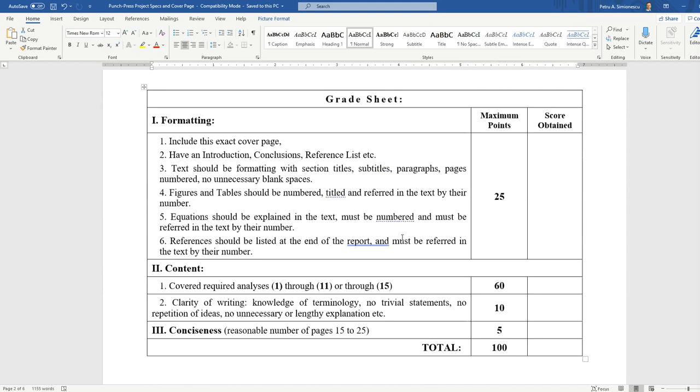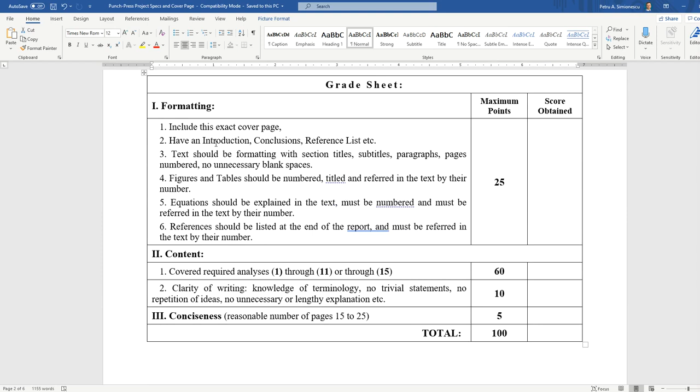This cover page will be made available to you. Pay attention to the grading scheme here. There are 25 points just for formatting. Please read carefully. Make sure to include the cover page, of course, filled out with your name and who you collaborated with. Everybody has their own values to work with, so it doesn't mean that you will submit the group project. It doesn't mean that there will be two project reports identical.

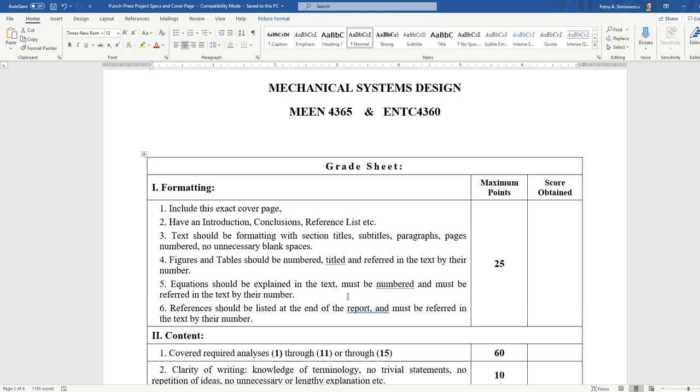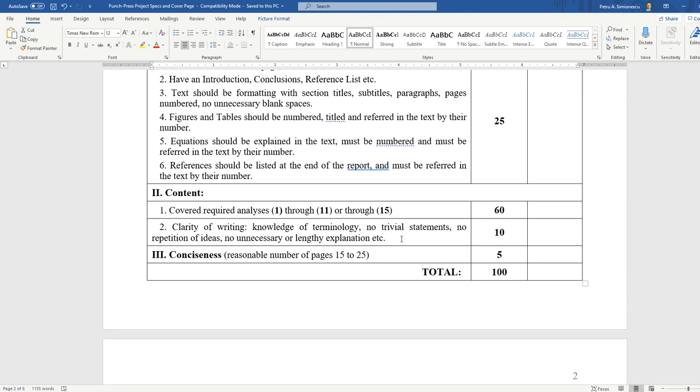If you check the syllabus, you have to submit a midterm project report and the final project report. Note the points for conciseness. Midterm project reports include steps 1 to 11, and then the remainder steps, which are actually 17, so I need to make an update, will be for the final project report. This is very time consuming. It's also used, the results, scores obtained by students on this assignment, as an assessment tool for program accreditation, ABET accreditation.

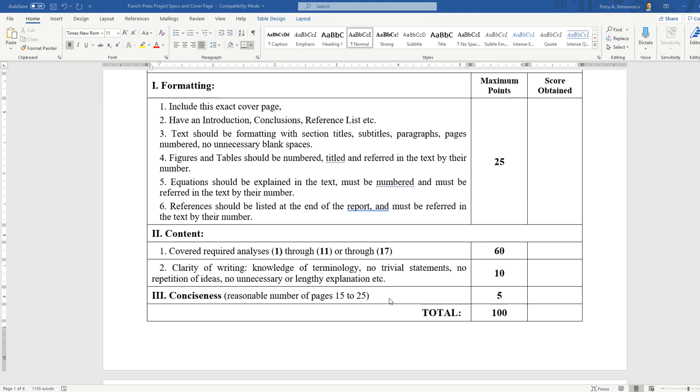Okay, so what you will have to do is to choose your own values. This table here with rows 1 to 8. So first you select the material, check 1, that you will be punching hole through. Thickness, you have some recommendations here on the values, and this will be the crank RPM at 7. You choose the RPM, so number of punches per minute is the crank RPM.

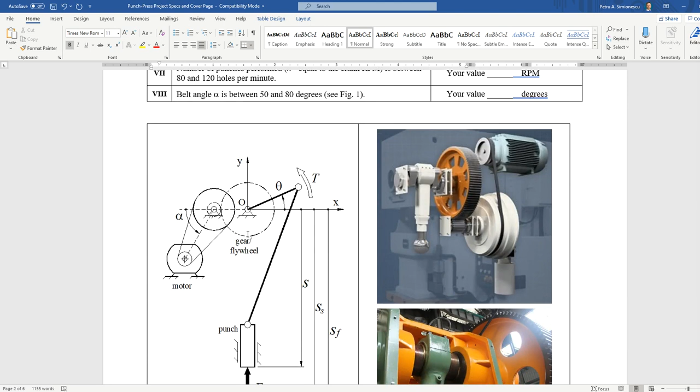Okay, so this is a kinematic diagram. It shows the slider crank mechanism. This is the punch that penetrates through the stock. There's the crank length, there's connecting rod length. It's not a centric mechanism. You need to choose a slight eccentricity, and it moves vertically. Slider moves vertically, not horizontally. So please make sure that the analysis that you're doing and figure that I'm seeing is for this kind of orientation of the crank slider mechanism.

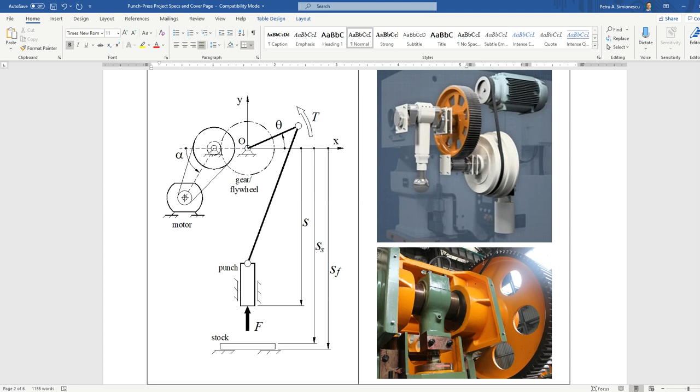To the left, you see schematics of the electric motor. This will be the sheave on the motor shaft. This is the sheave on the intermediate shaft, the one that you have to calculate, which has a pinion attached to it, and the pinion meshes with the gear, which is moving together, is assembled with the crank of the press. I have here some photographs.

This one is the most relevant. It appears to be a CAD drawing of some sort. I don't know how they got this translucent chassis of the equipment. So the electric motor, and it's right above. You have to specify it at the given angle so that you can practice a bit extra when sizing the shaft, with reference to the solid mechanics or machine design, that would be a better name for this class, the solid mechanics class.

Okay, so you have the motor, and it drives this intermediate shaft. Again, this is the one that you'll be calculating, and it has a large pulley to it, and then there's the pinion that rotates together with the shaft and with the pulley, or rather this large sheave pulley.

I'm saying it now, so one of these presses has a clutch included, where if the motor is running continuously, you actuate the press only at a given time. You engage a clutch and it makes the punch cycle. But that's not something for you to worry about. You're just assuming that it's continuously driven.

And then the gear, this large gear, which acts as a flywheel, and you have to size or calculate the required moment of inertia of the flywheel, mass moment of inertia, and then the crank slider itself. It doesn't show the punch itself. You can see here it uses a spherical joint, and the crank is actually maybe not visible here, but on this figure, the crank is just an eccentric shaft.

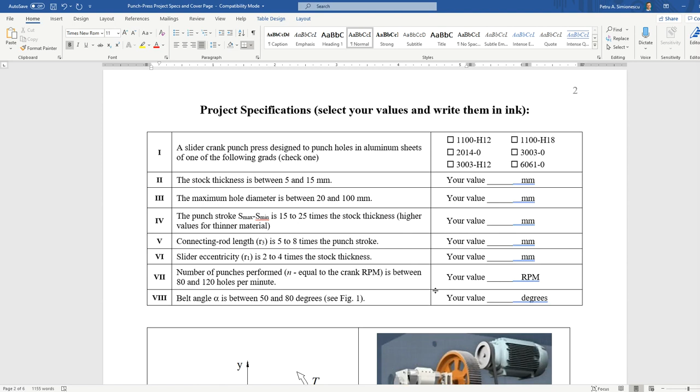We'll begin the chapter on kinematic analysis, so there will be additional theoretical material covered so you can progress with your project.

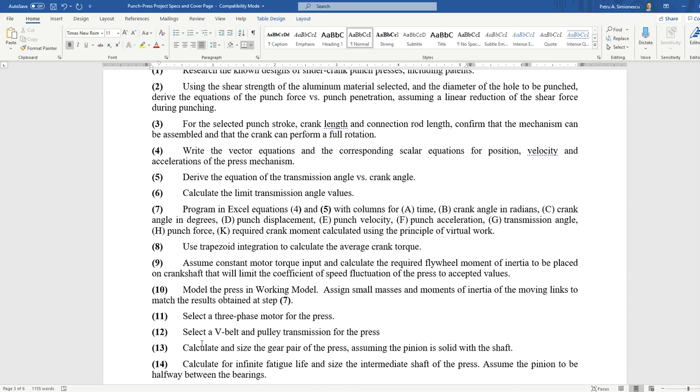I said there are 17 steps, and up to selecting the motor would be for the midterm project. We don't have a spring break, so usually I had the project due after spring break, so we need to decide around the middle, after midterms, to have the midterm project report submitted. But you can start working on this part.

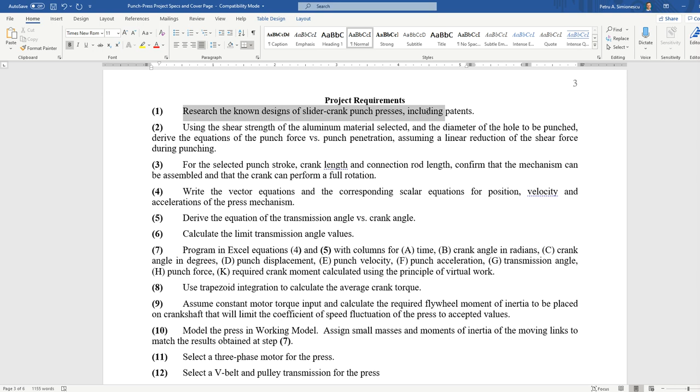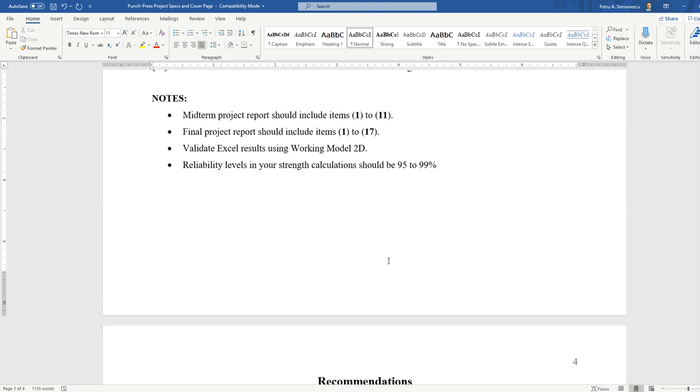Research the existing design of slider crank punch presses in patents. After page 3 of the project specification recommendation, I say do not include this page with your report. Here I'm advising you how to Google what the keywords would be, the search words, including some links. Make sure you understand what you're referencing in the introductory part. Search what others have done, what is out there. Make sure you understand it, not just dumping it into your report to add pages and volume.

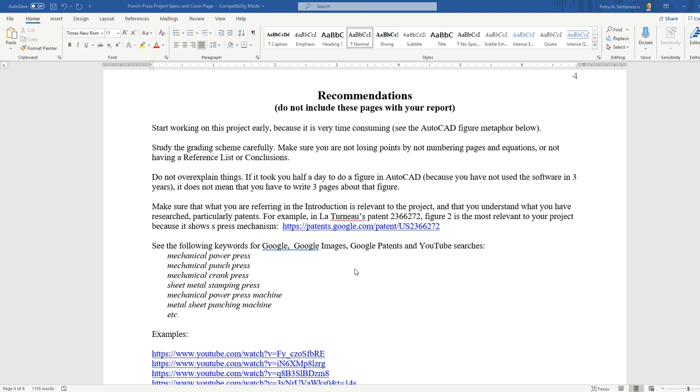Here are two screenshots, one of the Excel spreadsheet that you have to prepare, and the other one is for the working model simulation. I have both up.

In red, this is the way I organize it. So in red are the inputs: crank RPM, punch crank RPM or punch rate. For added flexibility I have these in red as inputs that I can modify, and then some calculated values, for example omega based on RPM. That's very easy to understand what this does.

Then the position, velocity, acceleration of the punch, and then this would be the pressure angle and its time derivatives.

Towards the end, force at the punch, which is a conditional force that occurs only when the punch is moving down and engages the stock, and the corresponding torque. Using trapezoidal integration, you're going to calculate the average torque, and then the energy required to produce a punch, and with that you're going to calculate the flywheel.

So you may want to watch this video later on as you progress with your report writing, calculations, and analysis. This is the working model simulation.

I have some meters here that give it maximum flexibility. I can move the stock in and out, and I ran the simulation several times.

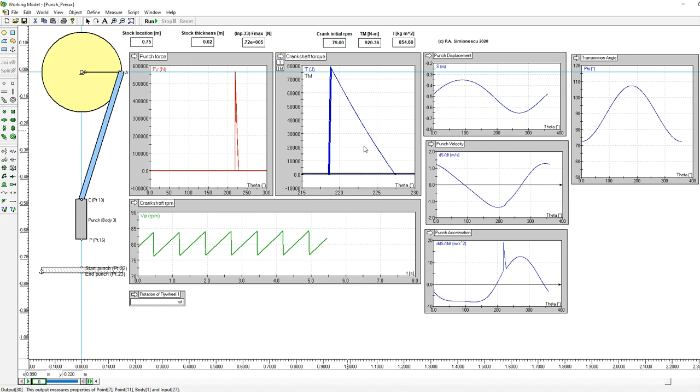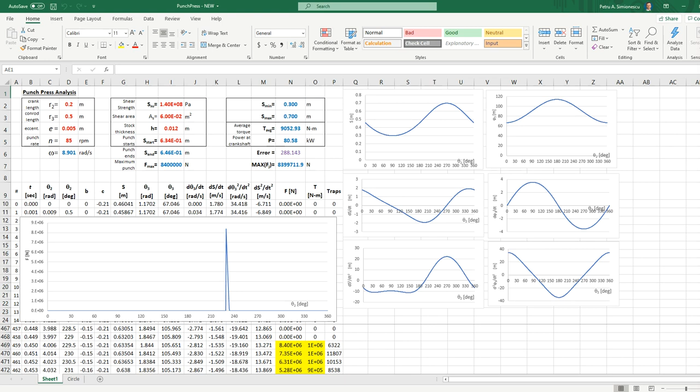I'm telling you now, we'll discuss this later: if this is speeding up or slowing down, meaning accelerating or decelerating, it means the calculated motor—that is the average torque you get from the Excel analysis—is not properly calculated. If it's too small, it slows down; if it's too much, it's going to accelerate.

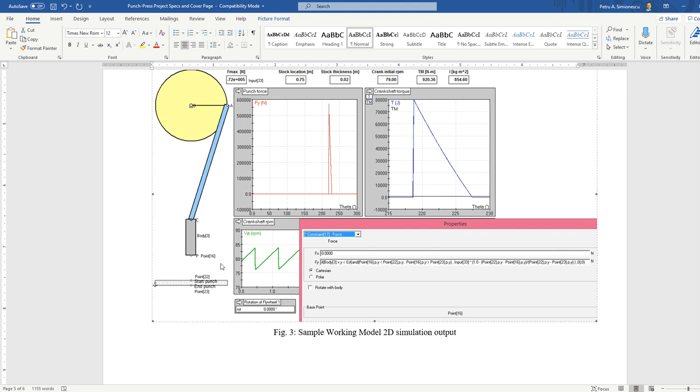This is the full equation you would have to utilize in order to define that conditional force. I'm helping you out—this is part of what I'm going to upload on Blackboard again. But you have to write this equation valid for the body and the points with their numbers. You may have values other than point 16 or point 22, 23, but they are found here.

So point 22 is the position in the y direction, and then for body 3 it'll be this one, velocity in the y direction. If it's less than 0, it means the downstroke. So if body 3, that is the punch, is moving up, this will be a positive velocity, and nothing happens.

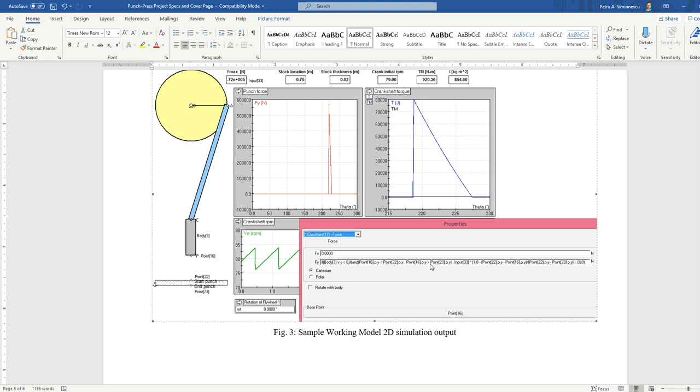Okay, so this is the equation using formula language of the working model. You have to implement it, and then later on, for the final project report, you have to size a pinion shaft.

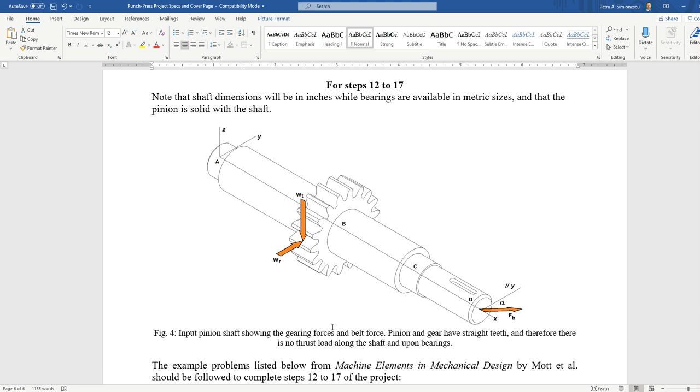The pinion is solid with the shaft, not assembled to it, has a keyway, and places for bearings. You need to select those bearings, bearing at C, bearing at A, and this is the belt force, and these are the gearing forces.

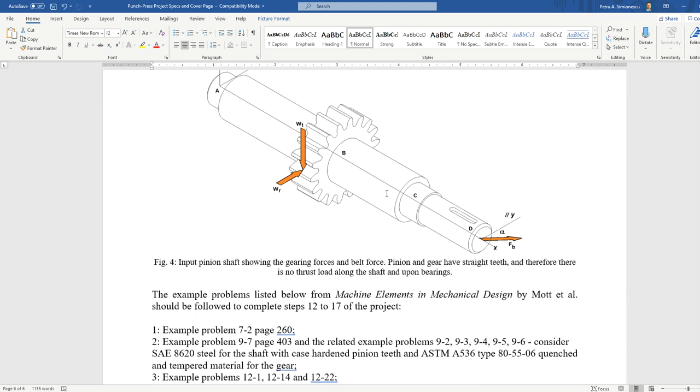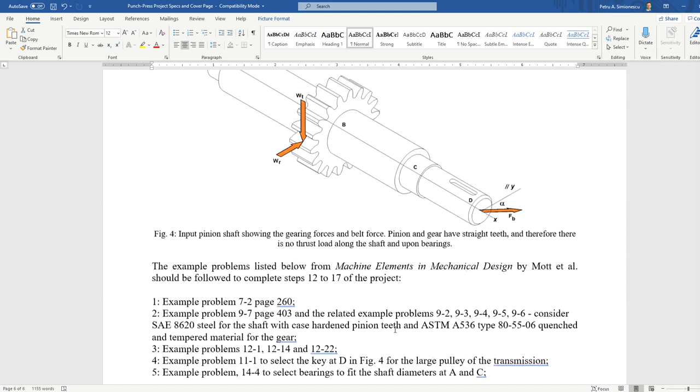You have to produce mechanical drawings, a complete mechanical drawing for the pinion shaft. I'm telling you what sample problems in the book by Mott to follow, and it's towards the end.

I would recommend you to draw the full punch press at scale early on so it's proportionate. So what you're seeing here, you have to draw it at scale: the crank at its given length, connecting rod of its given length, eccentricity as selected, and so forth.

Likewise the sheaves at their diameter, center distance, angle according to the specifications. Using AutoCAD versus drawing by hand - in AutoCAD, you just draw it at scale 1:1. Notations here show current displacement of the punch, where the punch starts and when it finishes.

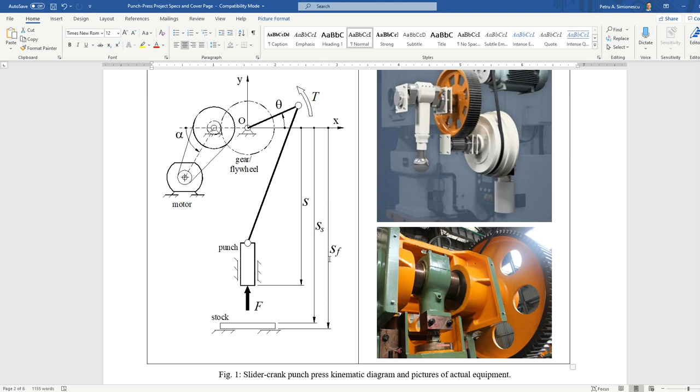You need to select these. Of course, when the punch finishes, SF has to be less than S max, when the punch reverses motion.

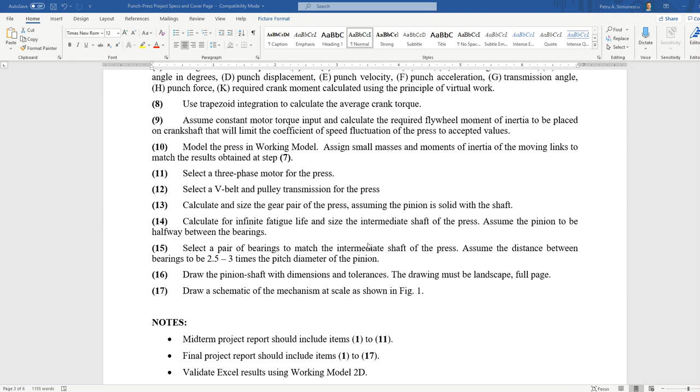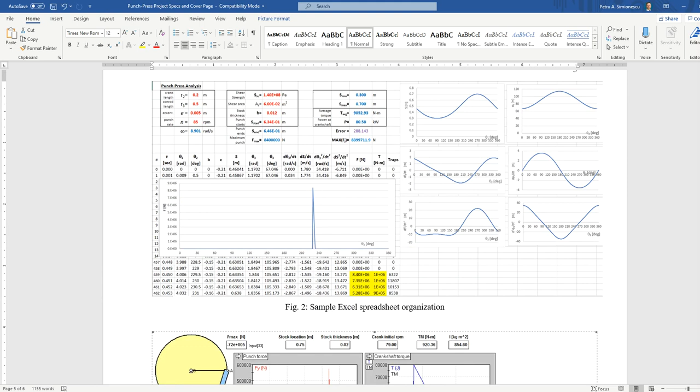All right, so this is what I had to tell you at this point about the project itself. In terms of formatting, you have indications or recommendations, grading criteria for formatting.

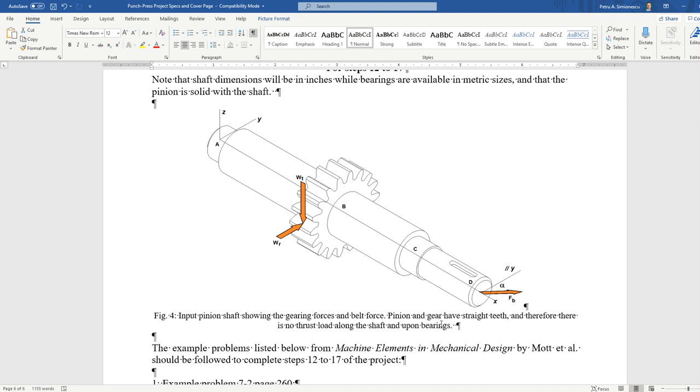But I know students don't know how to use all of the important features of Word - this is an added part to this introduction. So this button here highlights formatting elements. So when I hit the Enter key, I'm adding lines like on an old typewriter.

Learn how to work with graphic images. I hate to see AutoCAD screenshots with a black background. Learn how to copy vectors and paste them as Windows metafiles rather than screenshots - again, a lot of ink is wasted by just printing the dark background.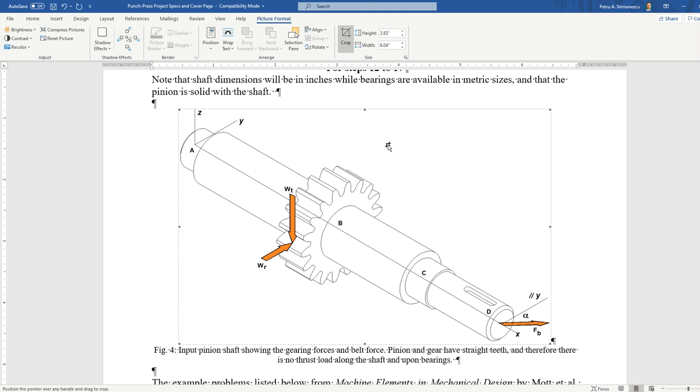Learn to use - I click on the figure, I click here, then picture format, and learn how to crop. Of course, I did this already. They're all relevant information.

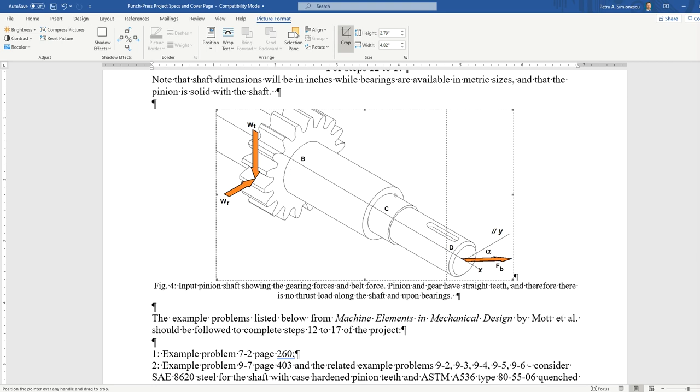But if you have unnecessary portions and want to show just a portion of this, say you're using this tool, learn how to use it. Click on the picture and use the crop tool.

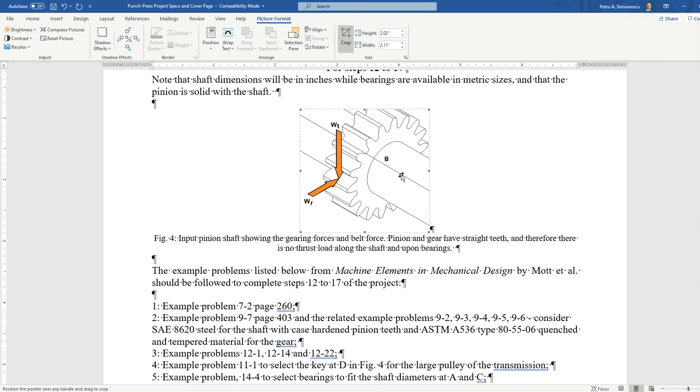What else? There are cases where you want to keep - I'm not going to save this - you want to keep the caption, for example, and it's already implemented here.

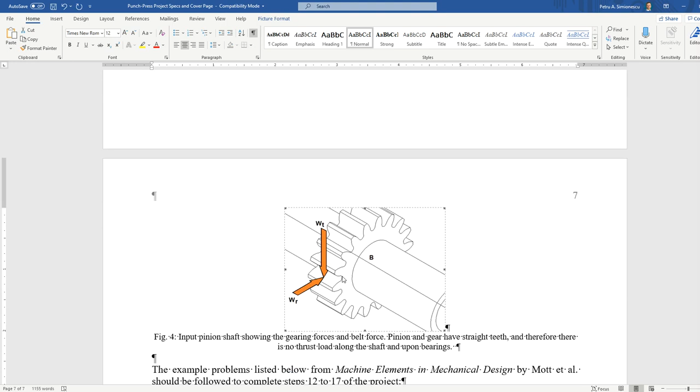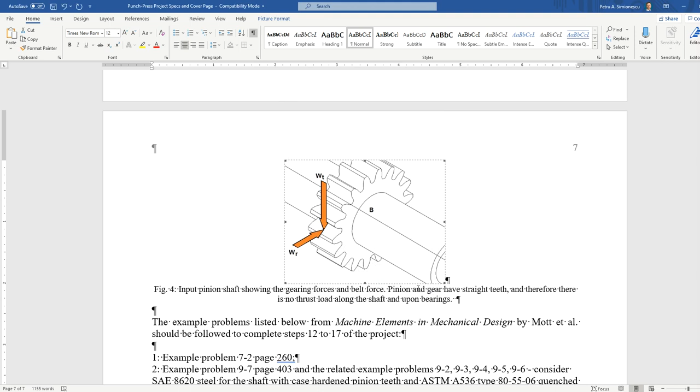I'm guessing, so let me double check. Okay, looks like so - there is an option, and I'm going to first take it off to make a point. Actually no, okay, that's fine. Let's see if I make this big.

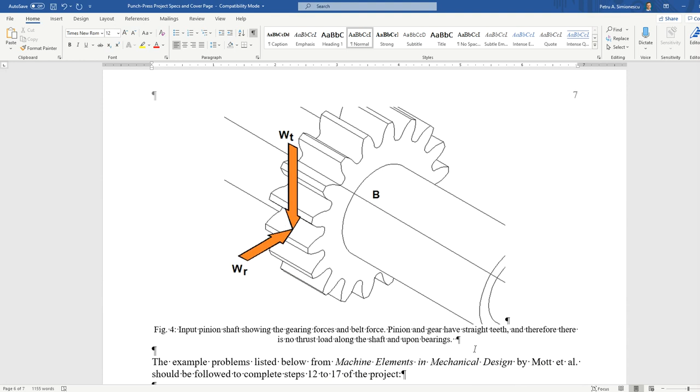What I want to say is that you want to keep the caption together with the figure. This I cannot undo, but I think I have it to where it behaves the way it should.

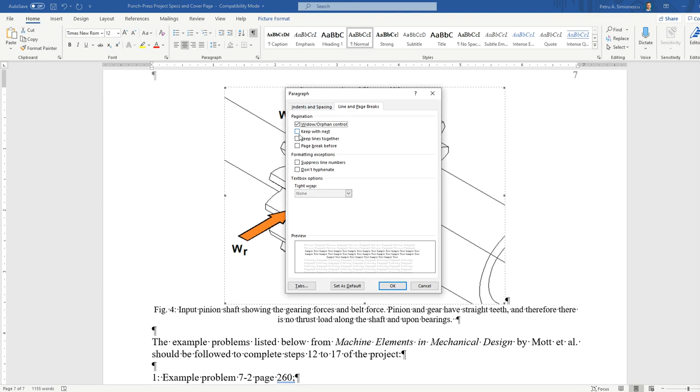Again, if you want to keep the figure together with the caption, not separate them onto different pages, you click on the figure, go to paragraph, then line and page breaks, and click keep with next. This will turn this marker on.

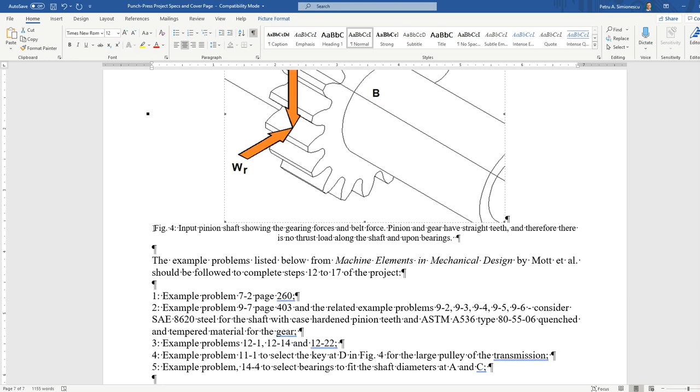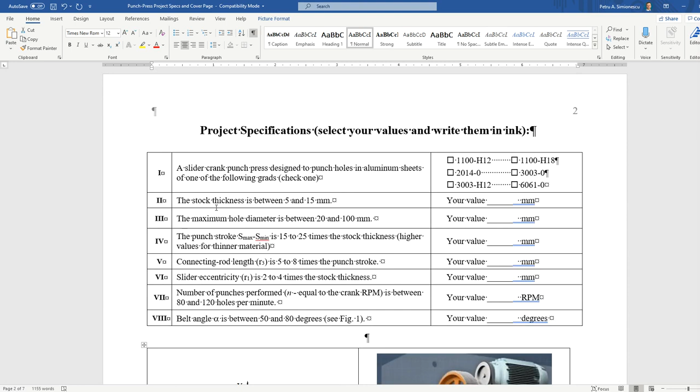You see it only if you're in this see-formatting mode, and it again keeps the figure with the caption. Note that figure captions are below the figures, and table captions are above, like you have it here. Let's say if I want to call this table 1.

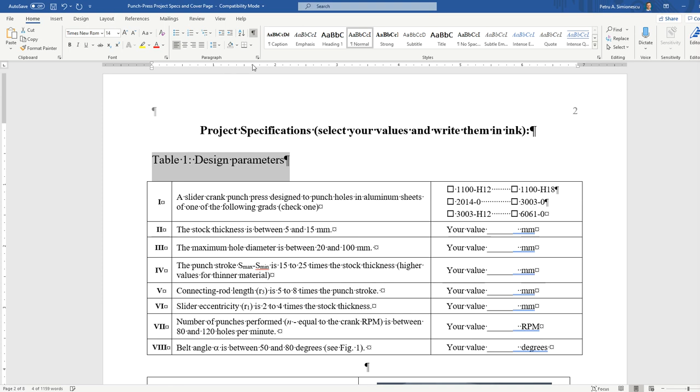Design parameters, so I have 18 point spacing. Okay, make it small. Instead of 14, I make it 12.

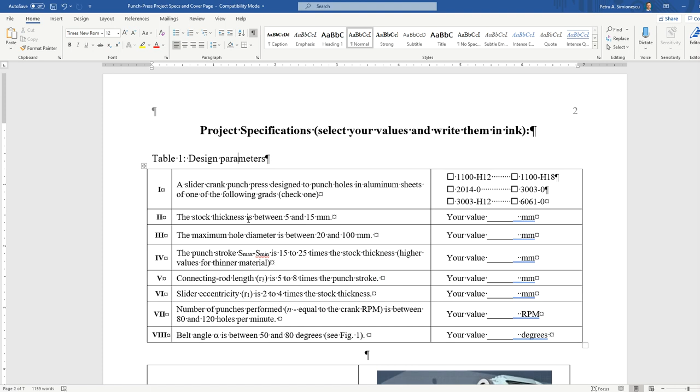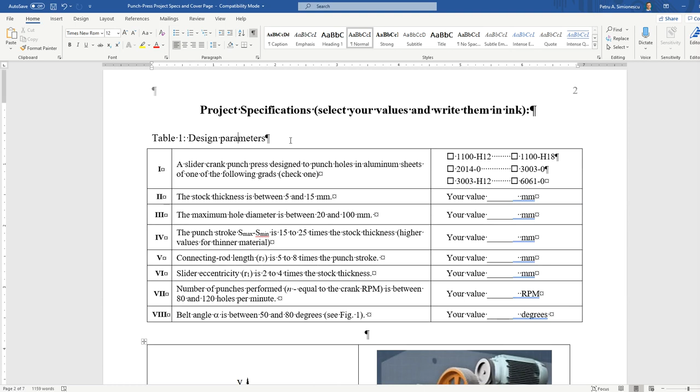You also want to keep the table caption or title above, and figure captions below the figure. If you want to keep this consistent, I could have something like this, with the table title, caption, and rows split between two pages.

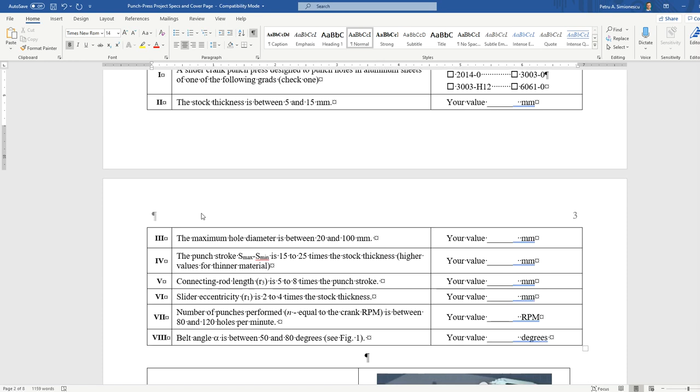What you can do is select all but the last row, go to paragraph settings, and select keep with next. Now they stay together. Make sure you do this so your report looks pleasing to the eye.

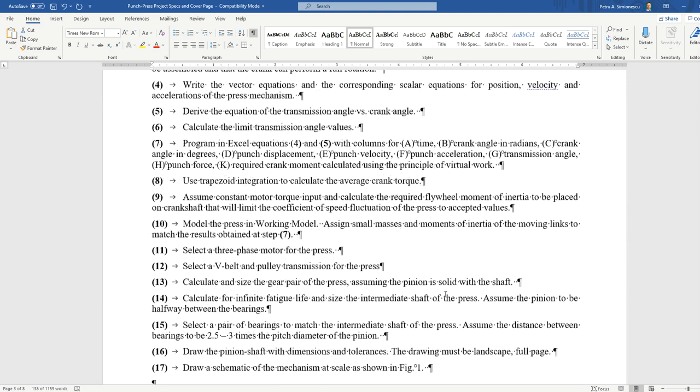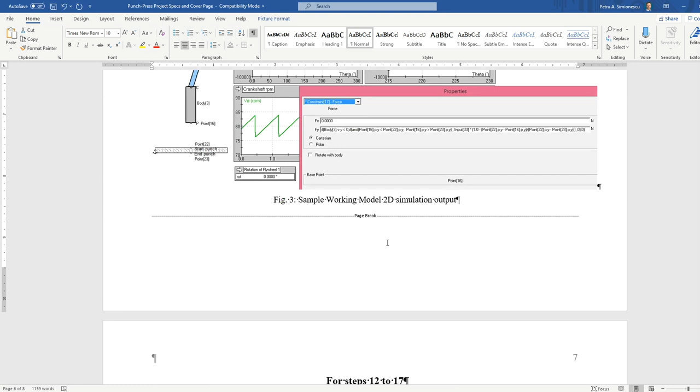It's not my case here, but if you want added resolution, and like I said, I'm expecting you to illustrate your work with screenshots and graphics, you may want to rotate a figure.

But I'm moving away from the main subject I want to explain. So what I wanted to do is rotate a picture.

Maybe this is saved as an older version of Word. So, copy, go to Paint, paste, and select view. Home, select all, crop. Select all, crop, okay.

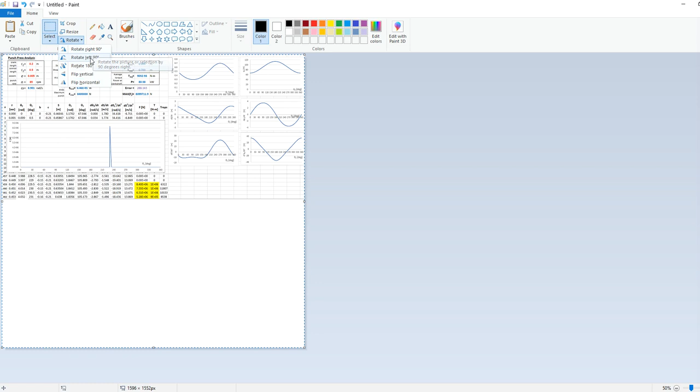Select all, rotate to the left. Okay, select all, crop. All right, so what I have is...

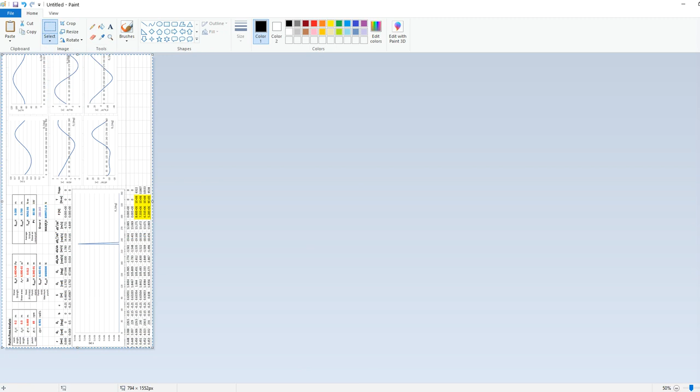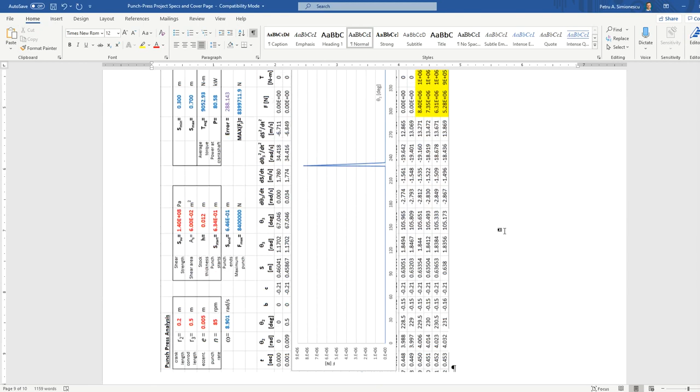I should have prepared this ahead of time. Okay, select all, copy. If you're going to place it landscape in the page, make sure it's oriented this way, not rotated like we have it here.

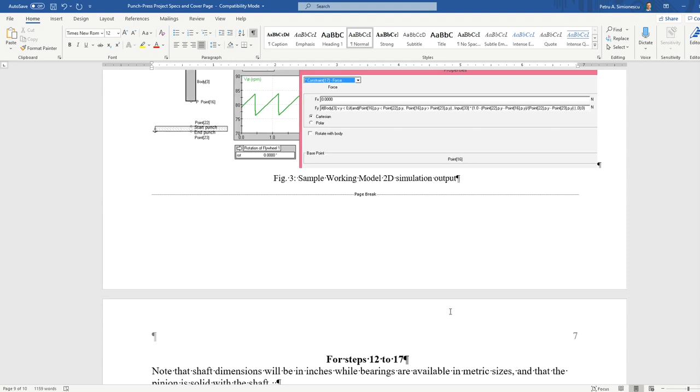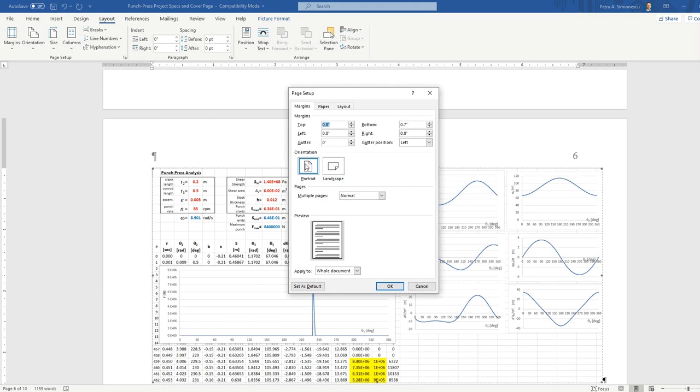180 degrees - the best way though, now I realize the best way, is to go to layout and make this the selection. So layout, page setup, and you can make it landscape for the selected text. Okay, so you have it here.

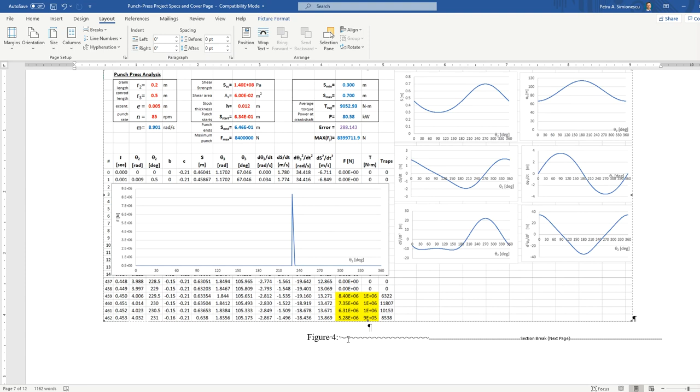You put it for whatever reason. Make sure you label figures, so that somebody running their eyes through your report, who likes the figure or is intrigued by it, can read what the figure is about. Make sure you have the orientation right - this latter approach is preferred, and I recommend you don't run into that situation.

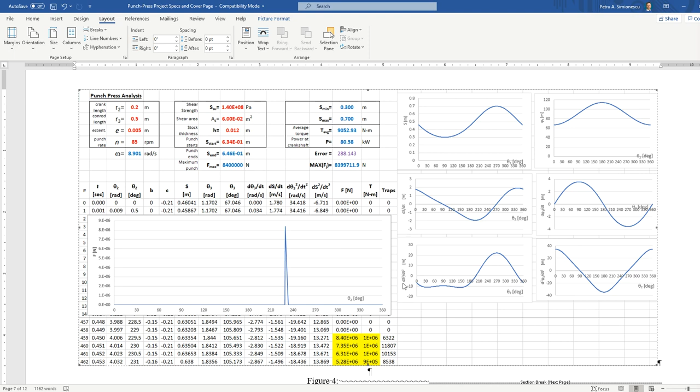I hate having to rotate a report in an unnatural way, where the pages I just passed are towards my belly as I'm looking through - I don't know if you get the idea. You can look through existing textbooks and reports, which are essentially technical literature, and see how they were organized, how figures, captions, or graphs are introduced into the text.

Lastly, there are instances where you want to keep text together between rows. You can do this: I deleted the original space, pressed Control and Shift, then hit the space bar, and this creates a space that won't break between lines.

And if you have a hyphenation that you don't want to break, instead of the regular minus or hyphen, you do the same: Control Shift and minus. These are not going to be separated between rows.

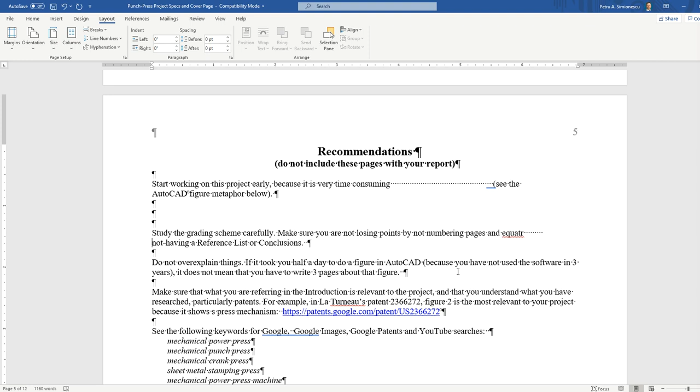Okay, so learn to use equations. Insert, home, insert equation. I was about to demonstrate, but I don't have it available.

So definitely, this was saved as an older version of Word. I could save it in its latest format and have the equation editor available. So, file, save as, and then Word doc.

Possibly, I don't know, I need to research why I cannot insert equations. Anyway, this being said, I stopped recording.

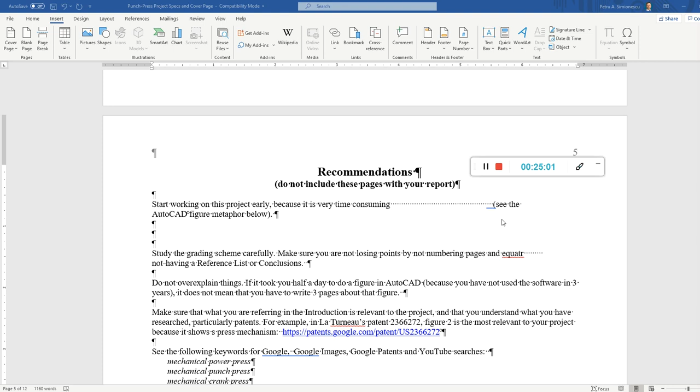25 minutes of recording - I'll post them for you, with additional explanation as you move forward with the project. Again, the literature review and dimension selection, so you know what the crank length, connecting rod length, and eccentricity of the slider crank are. You can do them right now. Okay, so we stop recording.